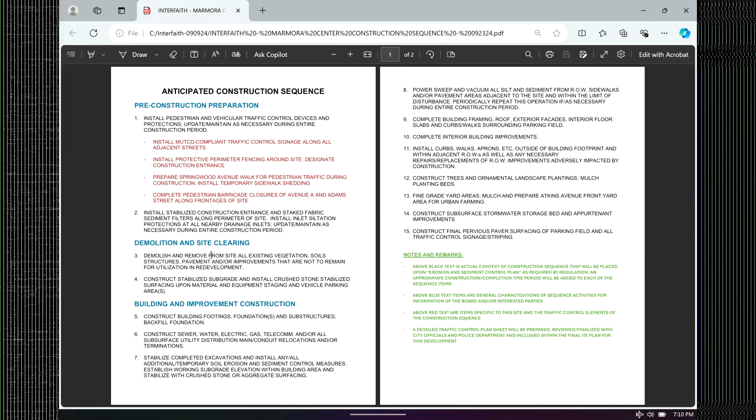I have another example just to illustrate. So what I have on this particular exhibit is a typical sidewalk. They call it temporary shedding, scaffolding, whatever you want to call it. It has fencing right up against the construction and overhead protection should things fall inadvertently as things are being constructed, but it allows pedestrians to go underneath.

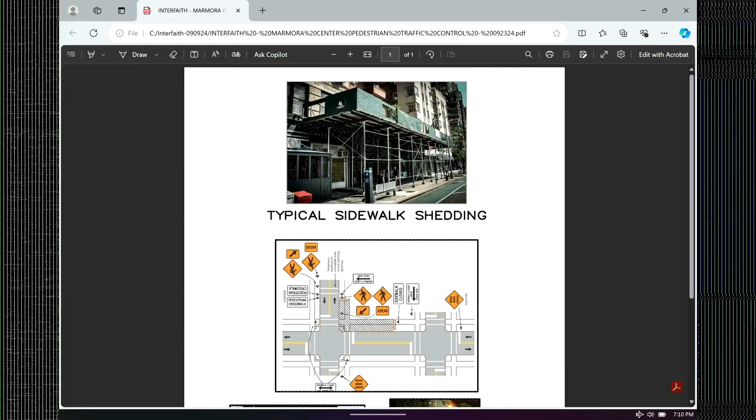Typically they are a minimum of 5 feet wide with a minimum of 8 feet of headroom, which seems like there'd be no problem. We will also be doing, to comply with requirements and make sure everybody's on board, a pedestrian traffic control plan, and as necessary, a vehicular traffic control plan.

There'll be some work along the curb lines of Springwood Avenue and along the curb line of Avenue A, and so those would require some temporary vehicular traffic control just to be sure everything is safe.

So the Manual on Uniform Traffic Control Devices has typical traffic control designs. This is just a typical one I pulled out of the manual. This is more geared toward pedestrian control.

And this one includes a temporary crossing, which I think we would do along the southerly side of Adams, because if you recall, there's a restaurant on the corner of Adams and Avenue A, so one could cross from the westerly side of Avenue A to the easterly side at the corner the restaurant's on with a temporary crosswalk. Other than that, the symbols, signs, and barricades you must use are all spelled out in the Manual on Uniform Traffic Control Devices.

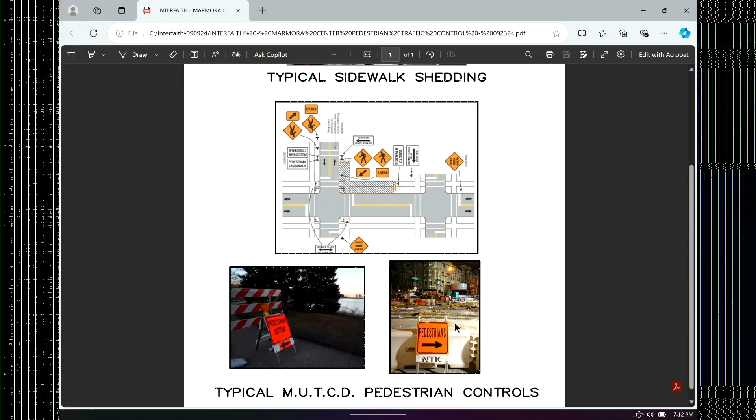And we would employ them. Per Sam's recommendation, we would coordinate that with the City Department of Public Works, but I'd also contact the police department, especially the traffic bureau, because they may have some valuable input. Other than that, we have no problem complying with any of that or anything else. And I haven't answered any questions yet, so.

Is the shed right around the corner? The sidewalk shed? Okay, so the shed would go—it doesn't go around the corner. I'm envisioning it, but I'm open to suggestions. That hatch is just their symbols, not our specific site—that's just a typical traffic control plan pulled out of the manual we have to reference.

Should it be lit underneath at night? Is there lighting? Oh yeah, it would have to be safe, certainly. The shed's just going to be on Springwood, along the Springwood frontage of the site, right against the building facade.

Because the other pedestrian walkway is closed, we're gonna close it too - yeah, there's no reason not to close with safety issues, Adams and Avenue A. As I said, there's no parking on the frontages of this site, so it doesn't really matter.

So I'd say thank you for providing this. A standard condition of approval is always to have a pre-construction meeting with James, and there's other few city officials there, right? No, it's just me. Just you.

Yeah, as long as you provide a site plan that I can see everything. I want to know the estimated amount of months it'll take for construction, what time of year you plan to do construction, and if any street space you plan to use, whether it's parking or street space during the project - like if there's anything you need a crane for. I just need to know where you're planning to put it and generally estimate when.

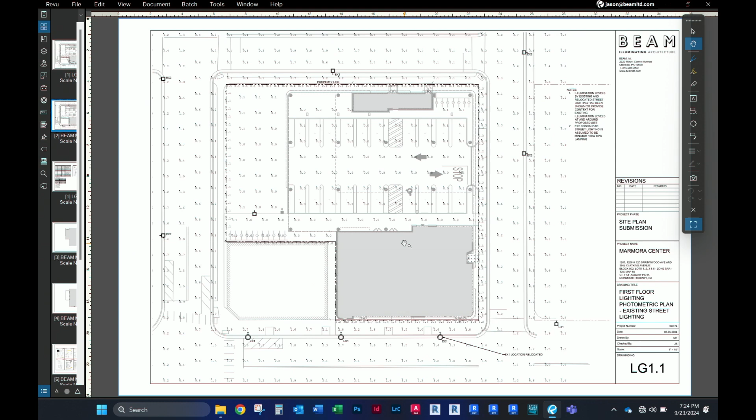The next sheet goes through the different calculations that we ran and the statistics for those calculations. It goes through each of the luminaires and provides a description for them, showing they are either all no uplight in compliance with dark sky, or if there is a minimal amount of uplight, it is undercover. So like the garage light has a minimum amount of uplight, but since it's covered, none of that will escape into the sky. So all of the lighting does meet dark sky requirements.

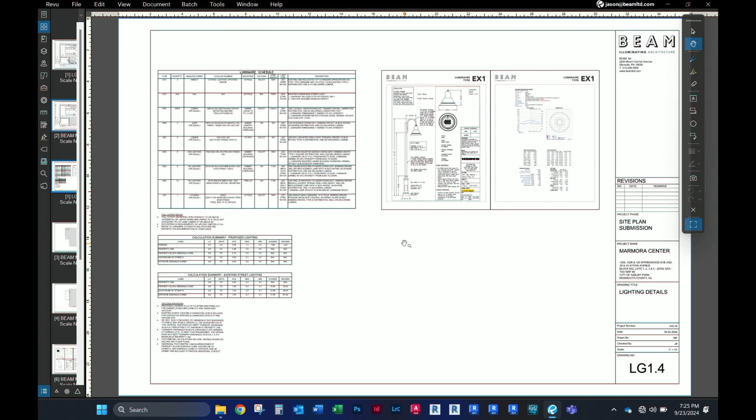In addition, all of the lighting we're proposing is 2700 Kelvin, except for the street lighting, which I understand is the typical pole for Springwood Avenue. That is 3000 K. And in our calculations, we did adjust for all of the outputs, the color temperature, and any other anomalies to be able to provide a realistic understanding of what illumination levels are on the ground.

And then just very quickly, the upper levels, we have fairly simple surface-mounted downlights at the trellis structures and recessed downlights where we do have a building overhang. Again, these are downlight only, and they are really targeted at the balcony floor areas themselves and will not provide additional light beyond.

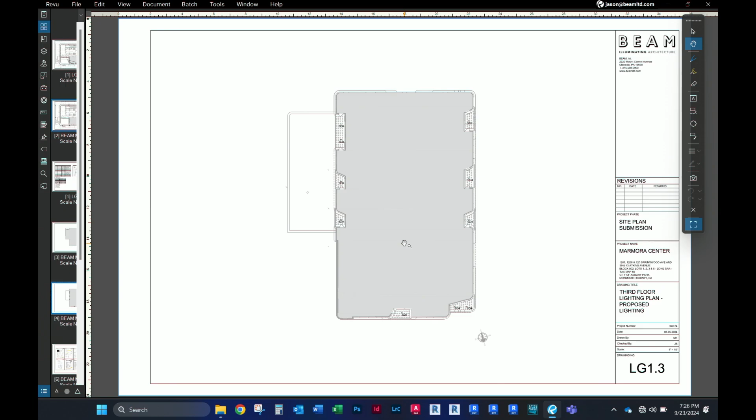So in terms of the engineering questions, I know that there were a few. Just get those real quick. I do think you hit them. I hit them all? Okay.

In your professional opinion, is this lighting satisfactory for this project? Absolutely. Does it provide any spillage that you would consider excessive? No. Okay, Mr. Chairman, I have nothing further for the witness then.

There was a question about, in Springwood, about the secondary egress, if you wanted opaque glass, regarding the lighting. So that was in there - the light inside the building that could be shining through the windows in the egress area.

Did you design the interior lighting at all, or just the exterior? We have not designed the interior lighting, but what we can do is ensure that it's a specification grade luminaire with a nice glare-free frosted lens, and also it can have an occupancy sensor that dims it when it's not in use, so that it dims down to a low level and is not obtrusively bright.

So there was talk that in several stories we're talking about transparent glass, right? Right, that would be illuminated at night out in the street. Correct, yes. So the issue was whether to use opaque panels or do something with the light, so it would not come out to the street or close to it.

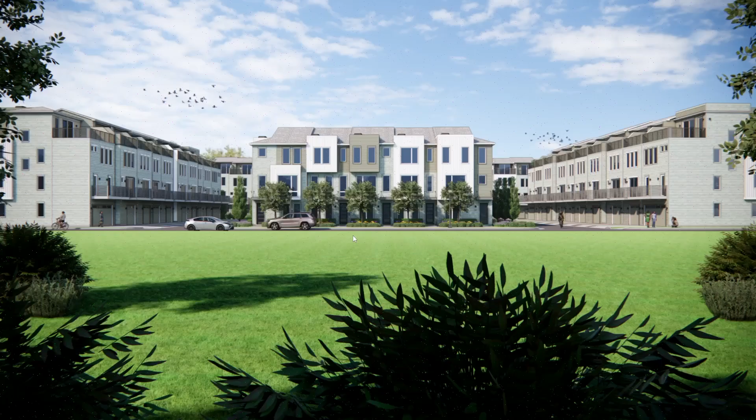When you were here last, you presented depictions of each side of the development, except for along Webb Street. I'd like to mark what you have up here as exhibit A4. Could you describe what this is and how it depicts how the buildings may look along Webb Street? This view of the proposed project is looking across Webb Street to the east. It's zoomed out so you can see all three buildings that front onto Webb. 8th Avenue is to the left and 7th Avenue is to the right. The street trees have just been omitted for clarity, but there are street trees here, 5 of them proposed. There'll be 1 in front of the 4-story townhome fronting on 8th, 2 in front of the 3-story townhome in the center of the block, and 2 more in front of the 4-story fronting onto 7th. Again, it's just an additional view for the benefit of the neighbors because we didn't have this at the last meeting. And the building along Webb Street, that's the 3-story building, correct? Yes. Those are all the questions that I have for our architect.

This grassy area doesn't exist, right? There's homes there. Just to be clear, this is a more reasonable view of what you'll see from the sidewalk across the street, but just to get the whole context in. Just for the public, I want to make sure we knew where we were.

All right, so I know that last time we didn't get to questions from the public for you. But before we do that, does anyone from the board have any questions for this witness about any of his testimony about architecture that we haven't discussed yet? Questions from our professionals about architecture? All right, let me take this in.

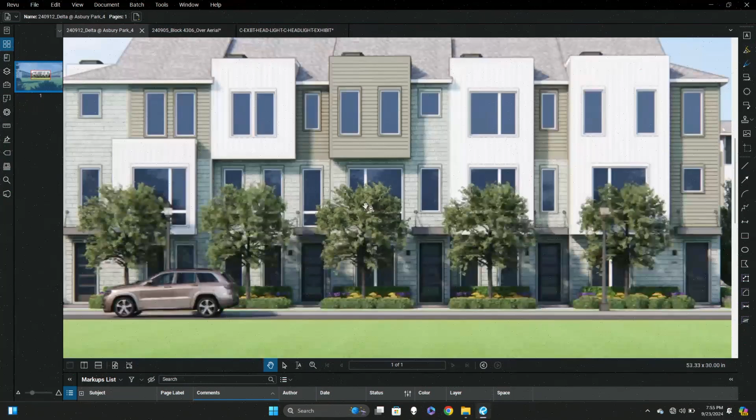Correct. So what you're really talking about is quite a distorted view from that. The bottom half of that rendering can be ignored. You pick up at the cars at Webb Street and we see the buildings. Exactly, it's only zoomed out so you can see all 3 buildings in one image, but if you're standing on the sidewalk on Webb facing this property, in the middle of the block, it's more likely this is your view.

And if you're standing closer to the end, it's more likely that you're going to be facing directly toward the 4-story and the driveway. So you're never really going to see this entire block as shown on the screen. It's going to be quite a bit closer to what you just put up.

Correct, if you zoom in, depending on where you're standing on Webb, you're only going to see a portion of the overall image. So the cars there are really what you're looking at and what's behind them, basically. That's what you see from Webb. Correct, and again the street trees aren't shown, but there'll be 5 street trees along this frontage.

So I'm just thinking of another project we had where, because there's going to be this whole row of cars parked in front of the garages, didn't we put an architectural wall up? Yeah. Is that something we think should be there? That was a Kingsley frontage. Yeah, and that had a more impactful streetscape.

Not to say that's not warranted necessarily here, but it's a side street compared to the avenue.

Can we see a close-up of the buildings on the end without the one that's in the center? Right here? Yeah, do you have a full view of that side? Right, those were shown at the first meeting, we had views of every elevation. I can pull it up. This would probably be going back into A2, which was the submitted architectural plans.

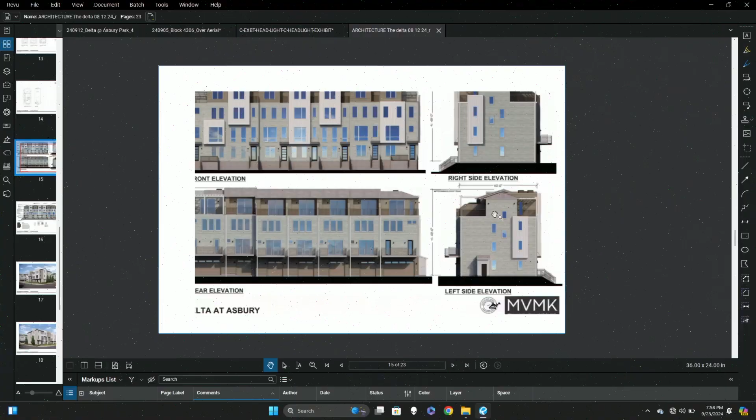So these are the elevations of the 4 stories on the corner. This is the side that faces interior with the sprinkler closet, and this is the side that faces the street. So this would be the elevation on the right side of the original exhibit I showed.

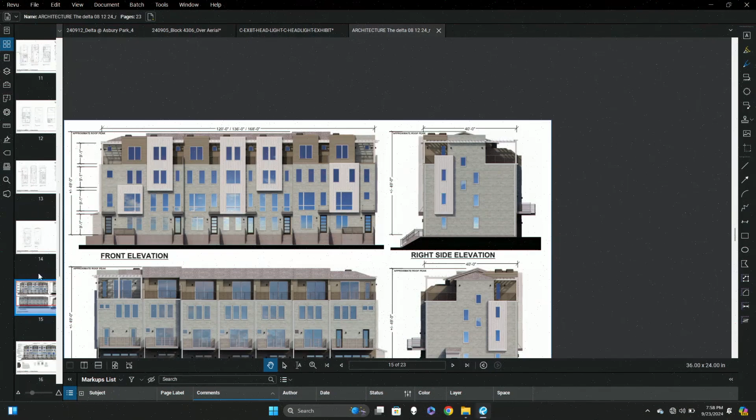It might be helpful if you could go back through the landscaping. So we do have the landscape architect up next, who will talk about the landscaping around the buildings. This is just an elevation view, it just shows the building, not in its setting.

But the report also points out that the lack of turning the corner creates, on multiple frontages, this sort of dead facade.

So if you want to maybe go back to the renderings that we had at the beginning, the pergolas are on the 2 corners on Kingsley, but not on Webb. Correct.

So we do have our landscape architect, as I said, who is going to show these buildings in the context of the landscaping that's proposed around each one, and that is our next witness up.

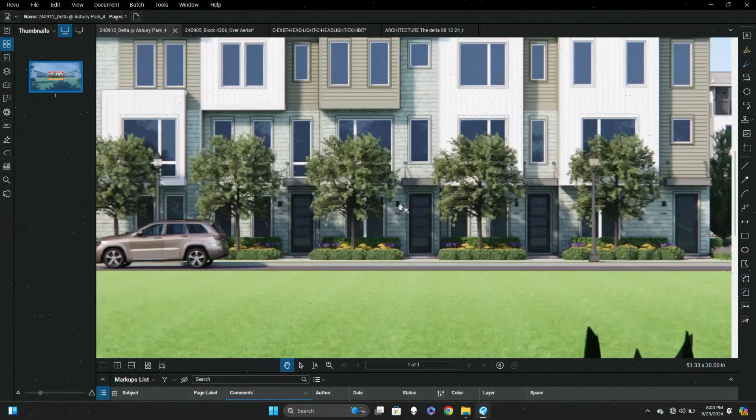Is that correct, there's no dusk shot here? If we zoom in, you can see there's a light at the entry of each one. What about on the decks? Can we see signage and then the lights? You can see there's some at the garage door, and then one up on the decks.

So is there anything board members would like to see potentially changed in the architecture? I know Dan just mentioned, could we have vegetation in the rear, and variation of color and materials in the rear. If that's something you guys would be amenable to, maybe you could show us options.

Michael, did you bring up about the wall or something in the street at first, to shield the parking spaces? I mentioned that, but I don't know if that's something people think should be there or not. Donna brought that up in her report. Yes, but not on Webb Street, that's on the Avenue side.

If you look at item 1.2 in your report, I think you pretty much cover the whole facade of all the facades of the building, it seems to me. This is about the sides of the buildings we're talking about. As I read Donna's report, item 1.2 on page 1, she talks about all the facades of the building not being very friendly to the street.

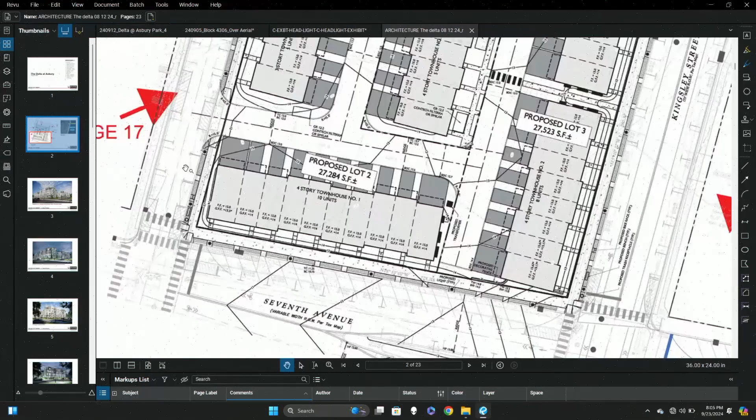No, he's saying parallel to 7th, the one that's parallel to 7. He's trying to say that the building's on an angle right now. What I'm saying is that the angle of the building is in connection with that lot. Oh, it's following the street lines rather than- yeah, I see what you're saying, the interior. But it feels like it should follow the street line. Agreed.

Maybe it should, but if you want to hide the view of those garages, it's a simple matter of just changing the angle. There may be another way we can help buffer the garage, but rotating the building has a lot of logistical issues. But I understand your comment, you want to screen the driveway as best we can. Why is it logistical? Why is it a logistical problem?

Just because of the way townhomes are constructed, you want to rotate the building, if I understand you correctly. Yeah. So it would need to be constructed independently, or there would be a gap between the buildings where you're rotating them. It's the same layout, except you change the location of the green spaces between the buildings.

Right, I could have our civil engineer address why the buildings are spaced that way for the drive aisles. Yeah, I think there's an advantage to having the building front 7th Avenue. So maybe there's a different opportunity to screen those garages rather than rotate the building.

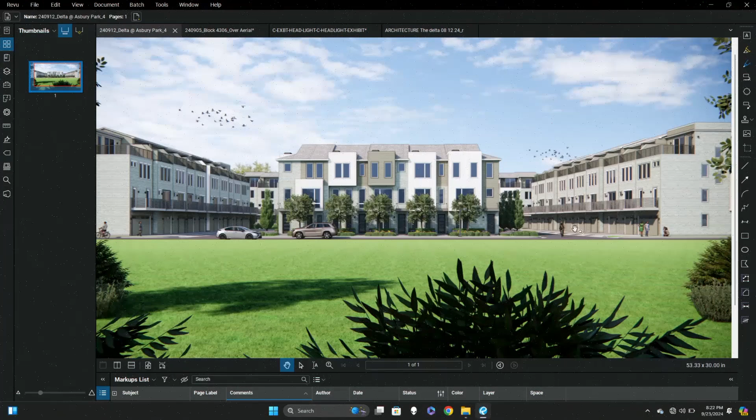Hi, Karen May, 301 8th Avenue. So question for the architect - the picture, can you go to the picture with the park-like look from Webb? Yeah. So we've already agreed and you've acknowledged that that green space does not exist, because one of the doorsteps is actually nine steps from the sidewalk. But visually, that small building facing Webb, that's the three-story building - visually, to me, it looks to be almost the same height as the four-story buildings on either side, and you can't see the four-story building that sits behind it.

We need a question. Am I interpreting this correctly? I would think that with a 3-story building, I'd be able to see the 4-story building behind it, yet I can't. This is a perspective view. If it were an elevation view, you would see the 4-story building behind it. This imagines you're standing on the ground as a person. The building beyond it would have to be quite tall for you to see it. So you're not misinterpreting that this is a 3-story building, and there is a 4-story building beyond it. But you have to think about it like the way a camera works.

But the buildings to the two sides are also 4 stories and they appear to be the same height. That is also a camera effect. As you move away from the center line of the camera, the height appears to get shorter. However, it is a 4-story building and a 3-story building.

Like that picture of President Carter and his wife? Yes. And the Obamas? Yes, they seem like giants because it's perspective.

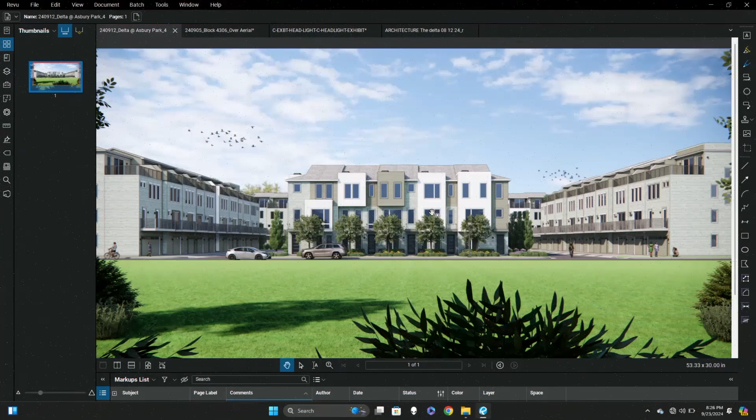I don't know that'll be enough, but understood. And if it's going to remain 4 stories, going down to 3 would be better, as Eileen said. But as far as architecturally along the back of the buildings, the decks and such that we're seeing, is there anything that can be done to make it look less plain? I think we touched on changing the color scheme, so maybe alternating the color palette.

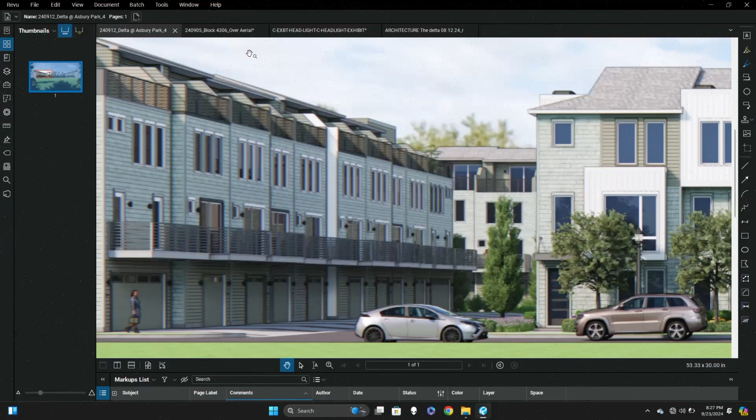It's still just going to be straight walls, though? Well, they are stepped, they do jut in and out, so it's not one continuous wall. It looks like it, though, so maybe with the color change it could soften it some. Yeah, it's primarily that view that doesn't help, but you can see that they are staggered.

It's obnoxious for everybody on Webb Street. That's it, no other questions right now. Thank you. Anyone else from the public have questions for this witness?

The last meeting I was here. My name is John Frederickson, and I live at 303 8th Avenue.

At the last meeting, when I saw the 3-story buildings, they were in the middle of Webb Street, right up to the end of Webb Street. There was a building down this way and a building down this way. We were told these were going to be 3 stories, and the rest was all going to be 4 stories on these 2 sides. That's not what I see today.

I see, if you can go to picture one. So it's the same plans as last meeting and this meeting. The site plan and architectural plans have not changed from last meeting.

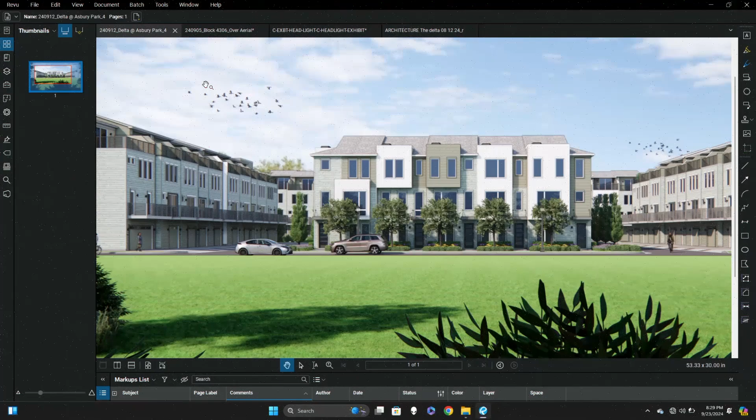Well, I'm talking about this picture. If you transform that into what they said last meeting, that center area would be pushed all the way to Webb Street. Where the cars are is Webb Street. Yeah, but you see these 2 sides here? They didn't exist. That 3-story area was pushed all the way to Webb Street. They're not pushed all the way to Webb Street here.

So I think maybe our civil engineer can testify as to the location of the fronts of the buildings relative to the sidewalk. You'll have additional testimony from the civil engineer about the layout of the entire block and what buildings are where. But just for clarity of the record, we have not made revisions to the plans. They are exactly what was testified to. This was just an additional illustrative exhibit.

Last time you showed the elevation drawing for the 3-story building, with a different perspective in the architectural set displayed at the last meeting, so you couldn't see the 4-story buildings on the sides. No, and that's why we created the rendering you have tonight. We had no view from Webb.

Okay, any other questions from the public for this witness? Excellent. What did they say?

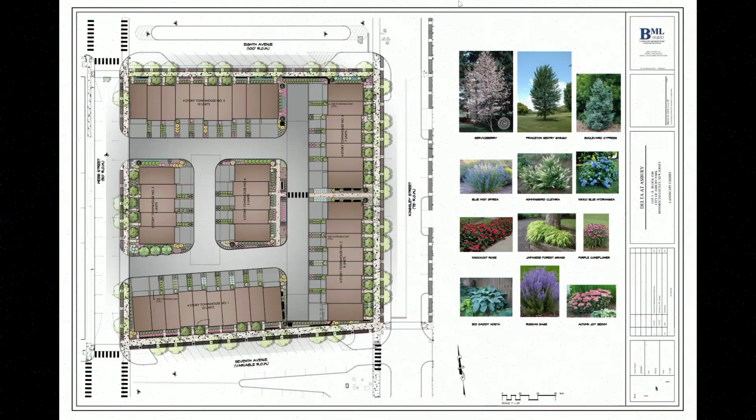Oh, okay. Yep. There we go. Okay.

Here you can see the retaining wall right along the edge of the sidewalk, wrapping into the back corner of the building. Behind the retaining wall is a series of evergreen shrubs, and then behind that some lower ground cover and perennials. From the roadway, what you would see is the retaining wall with the evergreen shrubs on top, which would serve to block the headlights.

What is the dark, hatched area above that? That's the sidewalk. Right above that, that's part of the streetscape improvements. That's pavement? Yes, brick pavers.

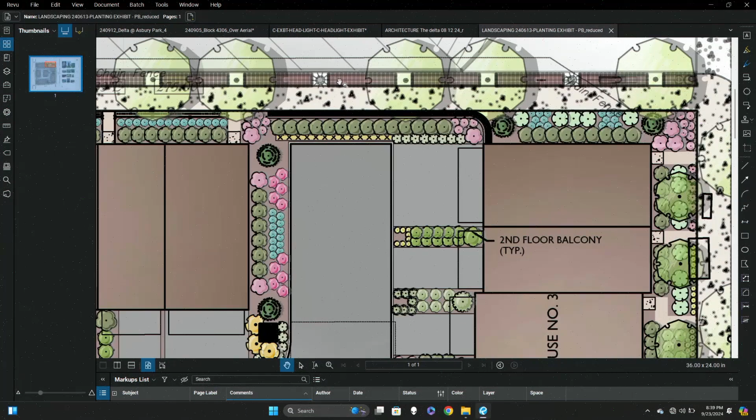And that retaining wall is a seat height retaining wall, correct? Yes, between 18 inches and 30 inches in design, so that you could sit on it as you're walking down the sidewalk. And there's another retaining wall that is a seat height, correct?

The other retaining wall is at the other end of that same driveway, and it's not quite as large. It just comes off of the building and wraps pretty much towards the end of where that driveway would be.

Who maintains those retaining walls? That's all part of the developer's property; they're responsible to maintain that. The HOA, yes.

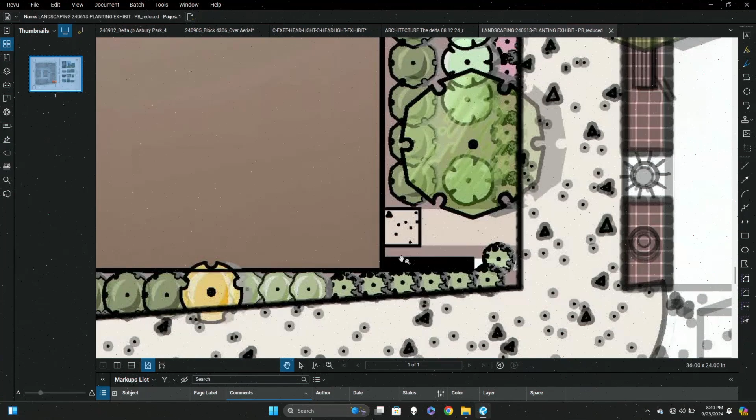Now I'll have Mr. Curley talk about the two other retaining walls, which are more structural, correct? I think one of them is right at the corner. Yes, there is one shown right immediately next to this one unit. It was more of a cheek wall against the walkway that goes up to that one unit, just to get the grades to work. While I don't think it's shown on this plan, the intention would be that the other side would also match and have a small retaining wall, very similar, right along this interior walkway.

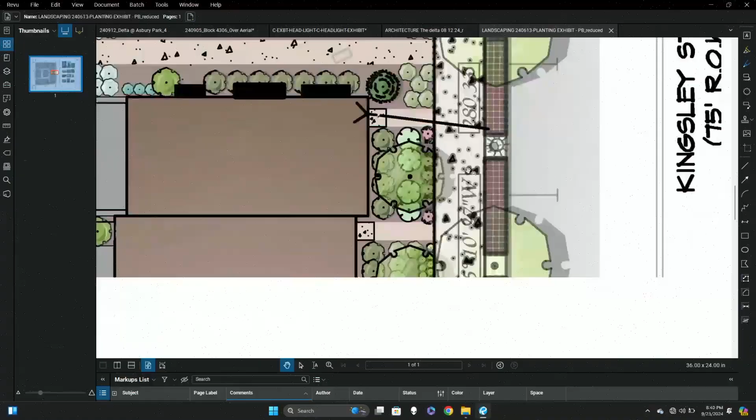Brian, scroll down—I think there's one at the south end of that building. The other one is at the south end of the south building. No, it's on the other plan.

If there are other retaining walls, this plan would be updated to show those and would be included. I know there were some coordination issues with stoops, steps, and porches that aren't reflected on this particular plan, but we would revise the landscape plan to accommodate those features. I expect these to be very minor modifications that wouldn't change anything I'm testifying to tonight, but there would be those two other, most likely smaller, cheek walls, we'll call them.

And the retaining walls on the sides—they're all within the property? Yes, yes, they're all within the property. There's no construction within the right-of-way.

So let's walk ourselves through more on the retaining walls. So the retaining wall ends up being kind of the same level as that driveway? Yes, the top of the retaining wall is level with the driveway. So it's not providing any screening to the driveway?

The wall itself is not—the wall is intended that you could sit on it. At one point, we had a fence on top of it to provide extra screening. I believe we've taken that out since, and we're just leaving the evergreen shrubs at the top to screen the headlights.

So if you could just walk around the block, showing at the corners where there's going to be landscaping proposed. Yeah, there is landscaping proposed at each of the corners. Because of the angles in the right-of-way, some of the planting areas do get narrow at certain points, but everywhere between the right-of-way and the buildings would be landscaped.

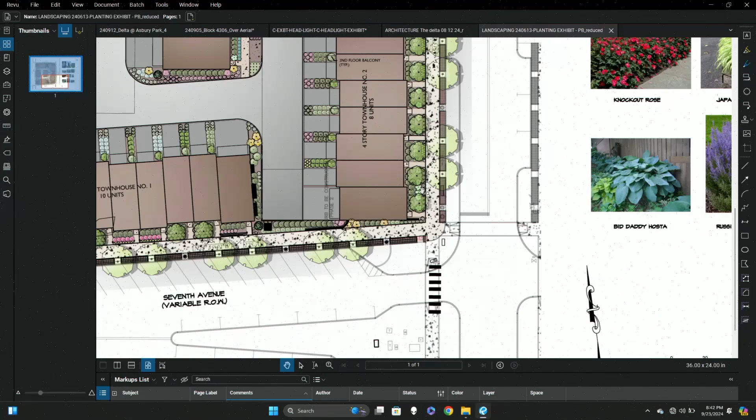Starting at the corner of 7th and Kingsley, these are the fronts of the units. You can see they all have plantings and a small tree in front of them. As we come down Kingsley a little further, there is a walkway that goes between the two buildings and gives a nice view of the central 4-story building.

Originally, that building was twisted 180 degrees, and the view you saw was the back of the building. One of the key changes we made was to rotate that building around, add a new walkway in front of it, and enhance the view so it looks a lot better as you're looking through that corridor from Kingsley Street.

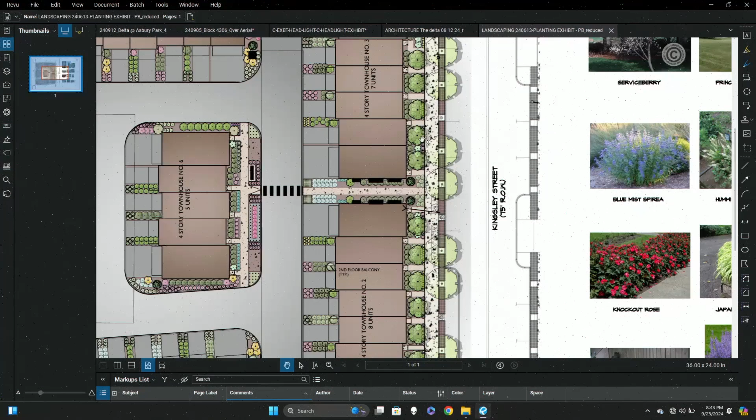Brian, can you zoom into the walkway? So you have the plantings directly in front of the utilities. And another issue, can you tell us about the blue plants labeled CB on the left? What's the height of those? Those are going to be about 3 feet.

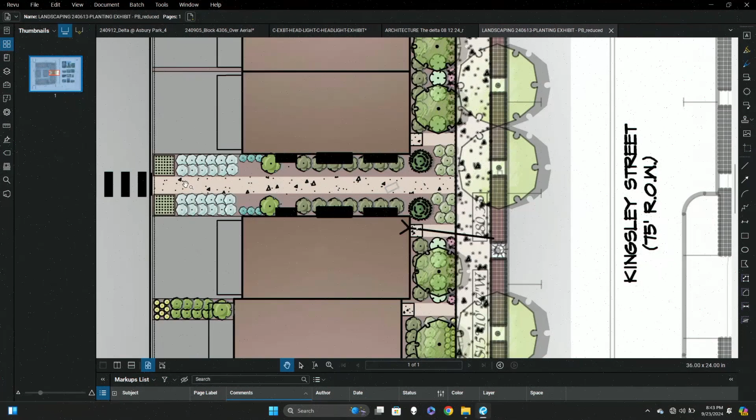My issue is that you have a mid-block crossing, so if you're walking across and you're 5 feet tall, you have 2 feet of elevation, plus you have cars parked there too. This might be more civil. Also right up against the walkway, we have a lower ground cover, which is probably 4 feet wide.

The ground cover is only like 6 to 8 inches high. No, I'm sorry, 4 feet width. So my concern, again, might be more civil - if you're walking across that walk and there's a car potentially parked there, are they 4 foot? They're 2.5 to 3 foot. They're not 4 foot, they're low, small flowering shrubs, nothing that's going to block a view. They're about knee high.

Okay, again, I think it'd be more civil with cars parked there, but that's fine. I don't see any visibility issues, especially with even a child that's only 4 feet tall, with the selection of plants there.

Okay, thank you. In front of the utilities, those shrubs? For the utilities are evergreen shrubs. Those may grow to 3 or 4 feet, intended to grow below the utilities. One of the challenges is how do you hide the utilities but make them visible to the utility company - it's a catch-22, you also have to access them.

Right, how would they access them? The only ones that would actually need access are shown with no plants in front of them. I believe these are more the electric remote read meters that you can see from the walkway. These are the only ones that needed actual access - that was the water, I believe.

But just like devil's advocate, if a meter needs to be replaced, how does the utility company access them? What's your plan? Yeah, they're small shrubs there, they do it all the time. I don't see meter replacement being an everyday maintenance function - if they had to remove a plant or two for access, they would do it and then it would be replaced. So if you're walking down that walkway, there's low shrubs and meters on both sides at eye level? Yes.

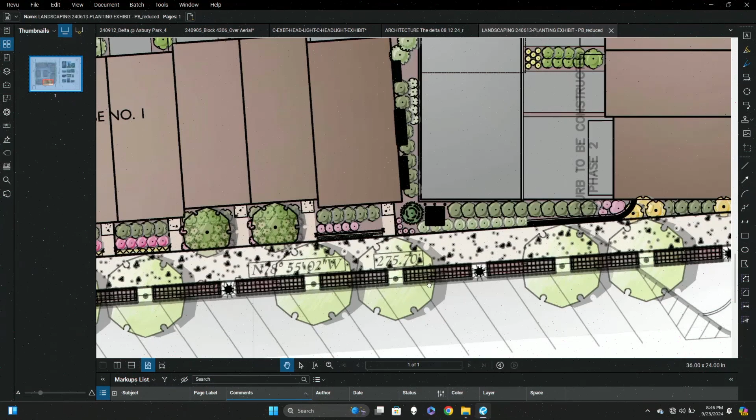And then I'd have the same question about buildings 1 and 4, where the meters are - are those going to be visible from Kingsley and 7th and 8th Avenue? The engineer would be better to talk about the location of each meter. But the only visibility I see is of the one transformer along 7th or 8th Avenue - I believe there was some discussion of alternative locations for that. As shown now, this transformer would be the only utility structure clearly visible from the right-of-way.

I'll ask Mr. Curley to go through each of the utilities when he testifies. You said you had a fence at one time above the retaining walls, but you took them out? Just at this one location at the end of the driveway, where we have the shrubs, the ground cover, and the retaining wall - we had a fence there, and there was some concern that the fence on top of the retaining wall would be overbearing for people walking down the street, too tall of a barrier.

But you want people to sit on the wall? That's the intent - to allow people to sit on the wall. Really? Yes, that was a request from the TRC committee. Are there any retaining walls on Webb? That I don't know - there are no retaining walls on Webb. Webb is actually the high point of this site when you look at the grading, so there's no reason to raise those units up any higher.

So if you continue down and around, just to establish that the landscaping does continue all down Kingsley, and does wrap the corner around 8th Avenue.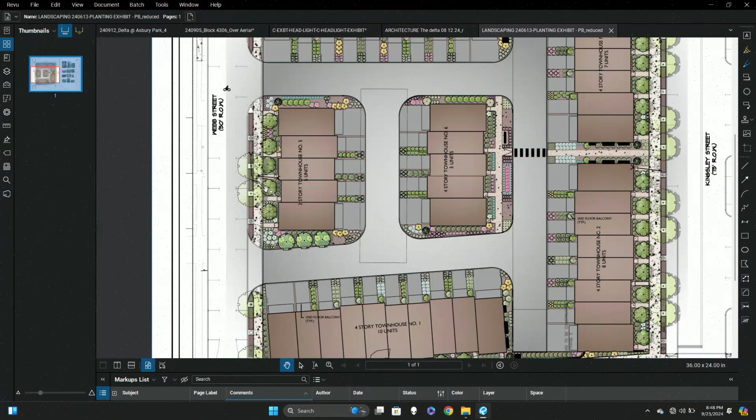As it's shown now, there's no planting strip along there. But in front of the four-story building that is facing Webb Street, there's an ample amount of landscaping, including small ornamental trees, flowering and evergreen shrubs, perennials, ground covers, grasses, very similar to what was shown in the previous exhibit.

The southern building is pulled away from the right-of-way a little bit, and we did have some opportunity to add some evergreen shrubs along that building to soften the feel as you're walking down Webb Street. So the only place that does not have plantings between the building and the right-of-way is the northern four-story building on Webb Street.

In the renderings, I don't think it was shown, but are there little planting spaces between each of the driveways? Yes. So you have plantings on the easterly end of the building. Right? Yes.

So wouldn't it be better to give plantings to people instead of looking at a blank wall, shifting that down? I'd have to defer to the engineer who laid the site out as to the location of the building. We'll have Mr. Curley testify next.

But as for the planting strips between the driveways? There was some comments and concern that the buildings, when you looked at them from the back, from Webb Street, looking down the driveways, everything looked plain. Those renderings did not show any of the landscaping in the areas between the driveways for each of the units. The original plan just called for almost a monoculture planting - everything did look the same. One revision we made when we came to the planning board was varying the plantings in each of those islands to give a more attractive and aesthetic look, and to soften it so it doesn't look like a hotel. What's the width of those strips?

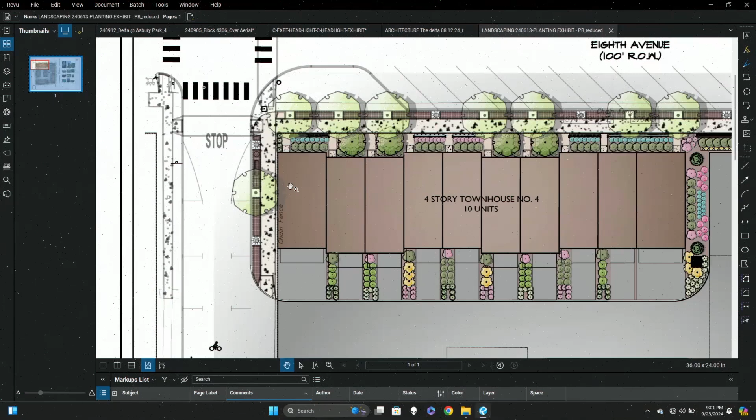So my question, is that building going to go right up to the sidewalk? Yes. There's no room for anything there? Fantastic. The engineer can verify, but I believe the setback to that building is less than 1 foot, so there's no reasonable area that you can plant anything there.

That's fabulous. Okay, now my next question is, if I look at the overall picture, I'm not seeing any grass anywhere, any space that is left, because right now it's all grass, or 95% grass, that lot. So everything is being either built or paved on, or you've put shrubs on. There's no actual grass remaining anywhere on this entire city block. No.

Last question, I don't know who this goes to, but you talked a lot about the master developer over the street redevelopment. Who approves that, and how do we get any say in that? Because that's a significant impact to those of us who live there, and I'm not aware of where that's happening, because it seems to be outside of this.

She's asking about the infrastructure component plan, the 8th Street, 8th Avenue changes. Ms. Smith can probably answer this better than anyone else.

Sure, and apologies for having my back to you, but the infrastructure component report is something that's already been approved by the council. The council has been asked to consider revising it to allow for those bump outs. But the infrastructure component report that sets forth the width of the streets, how the parking spaces go as far as angled versus parallel, that's all something that's already been adopted by the council and is part of the redevelopment agreement that was signed between Asbury Partners, the master developer, and the city.

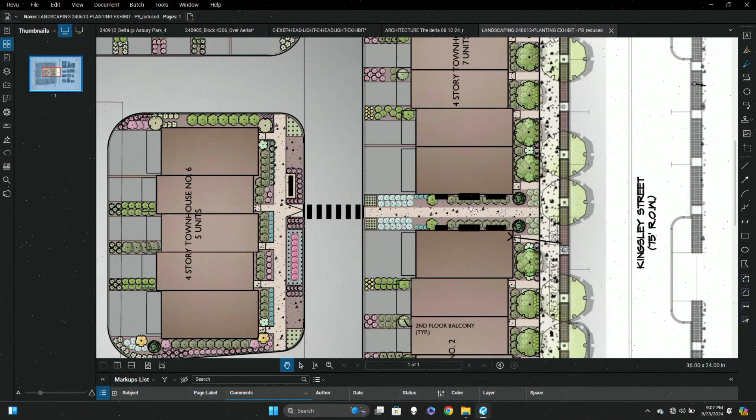What about in front of the units right there? There are plantings in front of every unit, in front of the interior units. Did you guys think of putting anything larger there? Did not, for spatial reasons.

Got it. And is there anywhere on the interior where you guys considered putting a larger tree or anything? We absolutely considered it at a lot of places, but due to the spatial constraints and the nature of the development, there's simply no room for larger trees on the interior.

Like a previous commenter said, so there's no grass anywhere? No, the grass was left outside. Grass takes up a lot more resources, and there's a lot more chemicals that go into fertilization and pest control. Shrub plantings, ground covers, and perennials that are native are much more ecologically friendly and would look a lot nicer, and you don't get the lawnmower and weed whacker out there at 7 o'clock every Wednesday morning.

So on the exterior, on the street side, do any of those plants encroach into the sidewalk, or are large enough that bushes will grow into the sidewalk area? No, the only thing is some of the ornamental trees in the front have a couple branches that start to reach the sidewalk at a higher level. If that happens, they would just be pruned back. But the intention is not to have any plantings within the right of way.

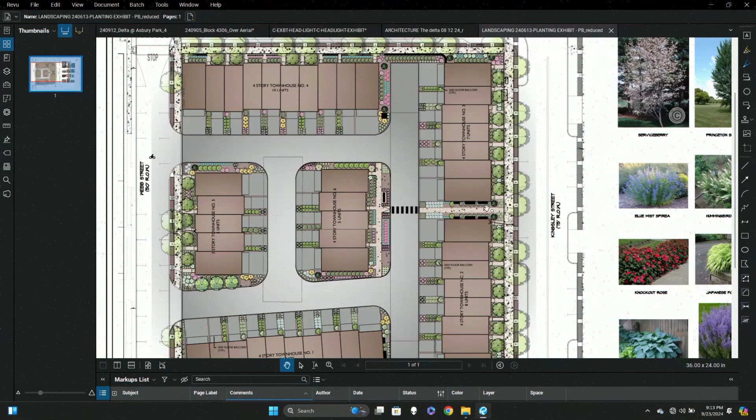So on the northeast corner, is there a tree right at the corner of 8th and Kingsley, on the interior? There is a small evergreen tree shown at the corner of that unit for an accent planting to accentuate the architecture, but it's not a large shade tree. Again, the shade trees along the streetscape will be provided with the streetscape component, which is not part of this application.

I'm just trying to figure out if there's anywhere you could get some extra sidewalk area in there. It's just so tight for surfers and people walking their dogs—there's a lot of people that go to the beach right there. Again, we're not encroaching into the right-of-way or the sidewalk area at all.

So this is why I was asking about curb extensions, because if you look at other avenues where they cross Kingsley where we do have curb extensions, you do get extra wide green space at the corners, which is nice to have. It's not currently allowed, which is why Ms. Smith mentioned they asked the city if it can be allowed - in the infrastructure component report, it's just not specified at every corner. So that's why they're asking for this corner.

And this sidewalk, so at the property line, there's the 4-foot sidewalk, and then there's like a 3-foot brick paver apron that runs to the curb. So between every tree, there is a kind of paved area - it's not a consistent material, but this material represents... I don't know if you can see what I'm pointing out here.

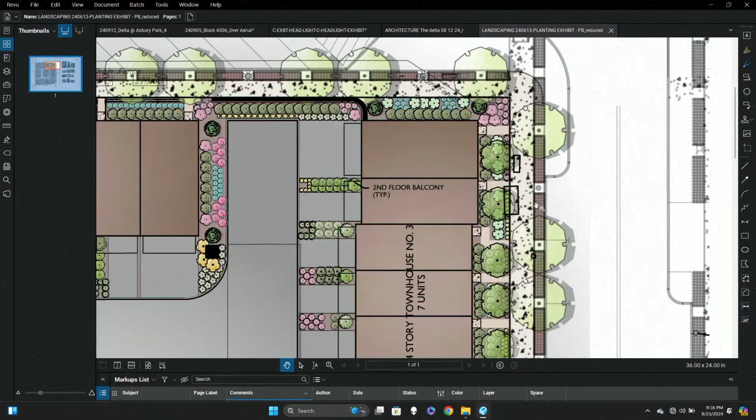Got it. So maybe this is a question for the civil engineer - currently at the end of the street, right there, the whole street widens about, I don't know, probably 20 feet on each side. So is that planting where the sidewalk sits right now? I don't know where the existing sidewalk sits in relation to what's being proposed.

But again, we are not putting anything in the public right of way. All of the plantings are on private property. Got it. Okay. Thanks.

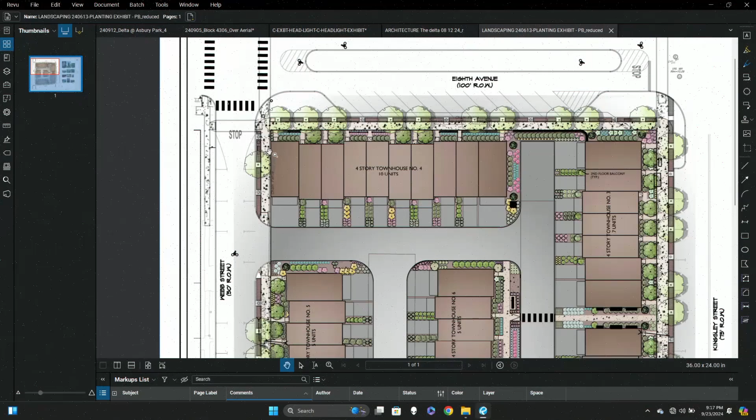Any other questions from the public to the landscape architect? Going back to the building on the northwest corner of 8th and Webb - your westerly building, dwelling unit is right up against the property line, correct? Within a foot.

What would you consider the minimum width of a planting bed in that area? It depends on what you're looking to plant. If you're looking to plant anything that would add a reasonable buffer, you'd probably need about, at a minimum, 3 to 4 feet, and that would be tight. Okay, and that would kind of match the planting on the south? That would more closely resemble that, yes. Okay.

All right, next witness. I know we've deferred several questions for our civil engineer, so I'd like to bring up Mr. Curley now to give his presentation and testimony and to answer some of those questions.

So as Mr. Curley sits down and gets sworn in - Mr. Curley, you swear or affirm that the testimony you're about to provide will be the truth, the whole truth, and nothing but the truth? I do. Can you state your name for the record and spell your last name, please?

Robert Curley, C-U-R-L-E-Y. We are going to be offering Mr. Curley as an expert in the field of civil engineering. So to that end, if you could just briefly explain your education, background, and licensure. I've appeared before this board - wow, for a long time.

Probably close to 18 years. I was also working with the master developer, preparing the infrastructure and ultimate plans that get built throughout the waterfront. I've been the design engineer on numerous projects and presented before this board for quite some time as a licensed professional engineer and a professional planner. But I'm here just to give engineering testimony.

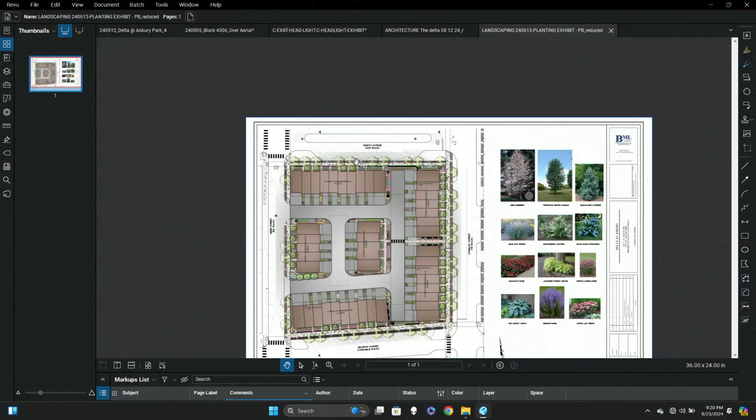Wonderful. So Mr. Curley, there's been a number of questions asked so far. I was going to ask you to start with the subdivision, but if you'd prefer to start somewhere else, please feel free. I was going to do a different presentation, but based upon the quantity of questions that arose on the infrastructure and what it's ultimately going to look like surrounding the property, I just would like everyone to understand that right now the roadway widths, in particular on the avenues, are going to be substantially increased. The cartway width, so the pavement, is going to get closer to the property lines. And what that's going to do is provide an opportunity on 8th Avenue to put in an island and have angled parking for the entire length.

And likewise on 7th Avenue, it'll be the same. There will be on 7th Avenue, Kingsley Street, and 8th Avenue a 12-foot width between the curb and the edge of the back of the sidewalk. Currently, there's arbitrary sidewalk widths in the range of 4 to 5 feet. So that's what will exist with the infrastructure improvements currently being proposed.

Bless you. So you're saying the street widths of 7th and 8th Avenue are actually going to increase? That's correct. What is the current width? Are they 200 feet there? That's not the flare out on those streets, right? What is the street width now? They range somewhere in... the cartway, curb to curb, I don't want to say a wrong dimension. I don't know that answer.

What I can tell you is that the improvements we're proposing will provide an equal amount of parking that exists today compared to when the finished product is done. Currently there are 45 parking stalls surrounding this block. When we are done, there will be 45 parking stalls. No, I know, but I thought you said you were increasing. That's correct, the street, that's correct, so it's going to be increased. So we're providing... and I don't have the exact dimension, I don't want to indicate an incorrect one, and in particular because of the bump outs on the corners there's some narrowing there, and we're providing 24-foot wide aisles. Again, I don't want to give you a wrong dimension.

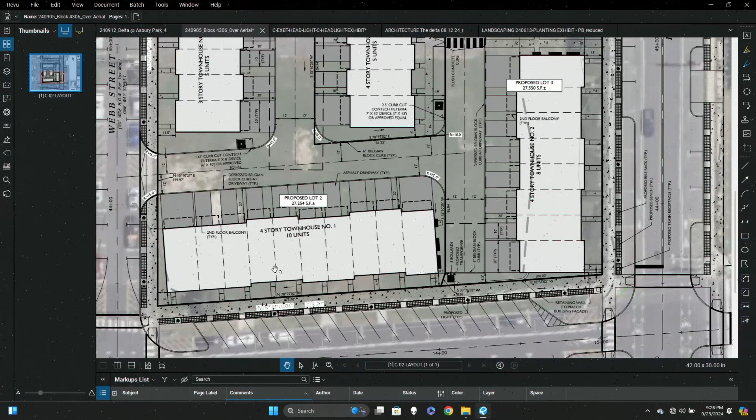Now when you're looking at that, the ones that front on 7th Avenue, it appears that the two ends are wider buildings than the ones in between. That's correct, the end units are a wider unit. So that'll go to the question about the planting, that the one at the westerly end is right abutting Webb Street, and there's not sufficient room for planting.

So if it were actually a lesser width, there would be more room for planting. Or if it was shifted down, where you have the planting at the easterly end of that row, if that was either split or moved to the westerly, then we could have some plantings on the Webb Street end building. That's a correct statement, yes.

Would that be difficult to do? Those would be one-car garage units, which are the interior units. That's not the intent. The intent would be to shift the building to the east to provide an equal separation distance from the curb line to the building line, and as Mr. Leff indicated, to provide a 4-foot area for plantings adjacent to the sidewalk. That could be accommodated, yes.

But that's something we probably should discuss with the applicant as far as the ability to move that down. Yeah, and Dan, you probably wouldn't want the narrower units on the end anyway, because the end units have windows and stuff on the side that give them visual interest. Well, I don't want narrow units, but I think the issue is to have some planting. Yeah, agree.

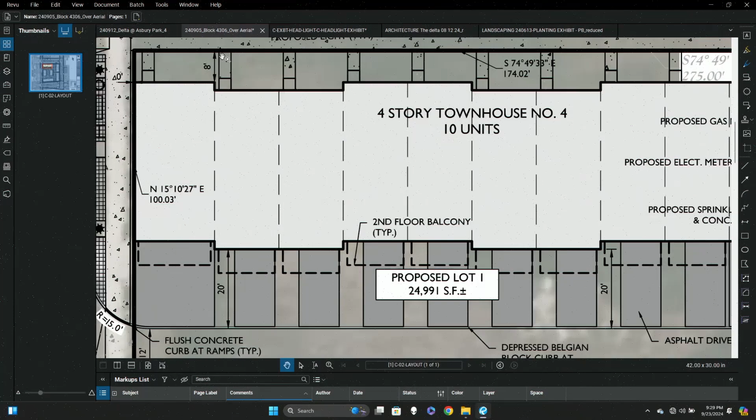And then what is the setback from the property line to each of the buildings? So for building number 4, from the property line to the building is 8 feet. So that would, for example, in that location, be between the building and the curb approximately 20 feet. That's correct.

The building to the back of the sidewalk is 8 feet. And then from the back of the sidewalk to the curb line, minimum distance... The minimum distance from the building to the edge of the pavement would be 20 feet. So that 8 foot is the steps and the planting area.

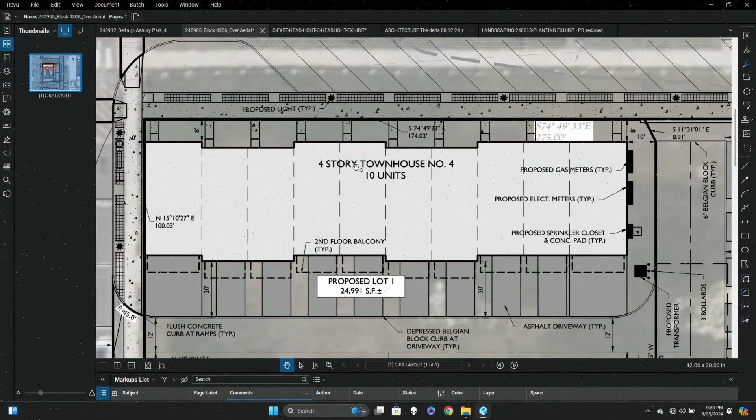That's correct. That's on the north side? Correct, on 8th Avenue, on the 8th north Avenue side.

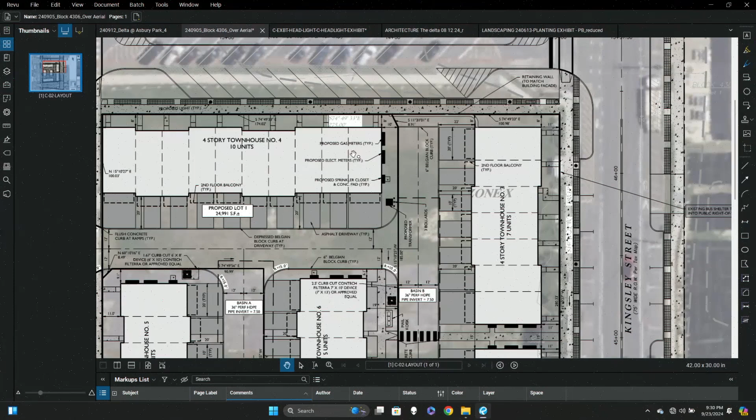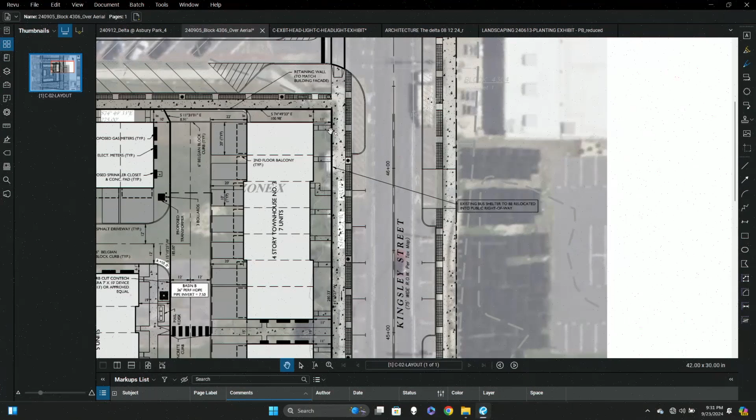Okay, if you could look at the same along Kingsley Street, please. So the side setback for building number 4 is again consistent with the alignment of building number 1. 8 feet to the building to the property line on 8th Avenue. And then from the building to the property line on Kingsley Street is 11 feet. So again, the minimum distance between the proposed building and the edge of the pavement would be 23 feet.

And that's consistent for building number 3 and building number 2. Now, the side setback for building number 2 is 2 feet at this corner. That's the closest.

And then it's still 12 feet from the back of the sidewalk to the curb. So that's correct, without the bump out. And that's correct.

And how about building number 1? Building number 1, again, has a consistent frontage setback to the property line of 8 feet. And again, you would have another 12 feet to the edge of the pavement. So that would be 20 feet from the building to the edge of the pavement, the shortest distance.

And how about on the side as you wrap around Webb? So the shortest distance we have is 3 feet to the property line. And then on Webb Street, we have 8.5 feet wide total from the curb face to the back of the sidewalk. So at the most narrow point in that building, am I doing the math right, that's still 11.5 feet?

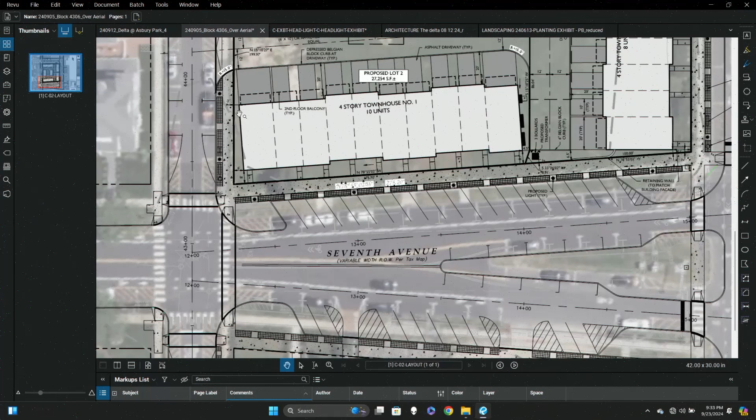And then how about the 4-story building on Webb? What are the setbacks there? 11 feet, so 11 plus 8.5 would be 19.5 feet to the edge of the pavement.

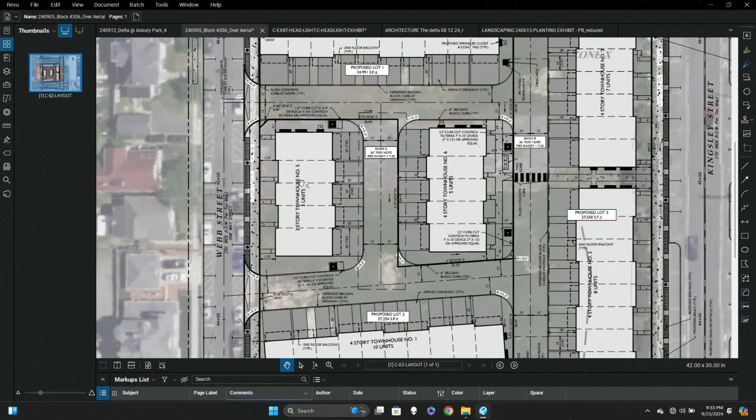All right, so you've talked about the setbacks. Before we get too far off the setbacks, if you could just discuss the proposed subdivision briefly. This has been completed on a number of applications that have been before the board previously. This is a temporary subdivision in order to affect the Fannie Mae financing that's associated with soils that have been deemed as contaminated. So it will help facilitate the remediation, is that correct?

That's correct. Now, in the subdivision we're proposing, there's currently 8 lots that make up the block, is that correct? That's correct. And after the subdivision, how many will there be? There will be 3. And will each of those 3 lots comply as to the total size and frontage of each lot? Yes. And then I think we've indicated that the lots will actually be consolidated into one lot prior to the final certificate of occupancy, is that correct?

That's correct. All right, I just briefly want to touch upon a few items. The first is on-site parking. How many total parking spaces are proposed on-site within the property lines? 114. And how many are actually required? 68. So 68 are required, but 114 have been provided. And will those spaces be located both in garages and also in external driveways?

That's correct. All right, I'd like to talk a little bit about the pedestrian access and walkways internal to the site. I know that there was testimony earlier about how the building in the middle was actually flipped around. Mr. Leff testified to that. Can you talk about how that then facilitates pedestrian movement within the interior of the lot?

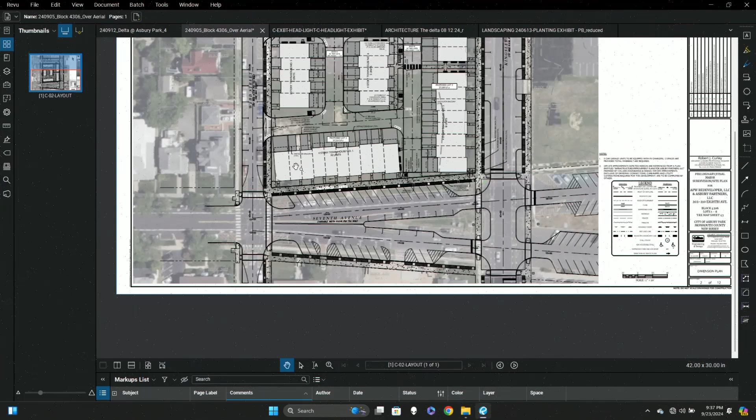This application is for a 4-story building, whereas an 8-story building could easily be constructed. We understand we're providing new development on an existing block that hasn't had development for a substantial amount of time. The waterfront redevelopment plan allows building setback all the way to the right-of-way line, but that's not what we're proposing. We've kept in character with the townhome development, with the front of the unit accessing onto the sidewalk, providing a small front yard area. I believe it's in the spirit of the waterfront redevelopment plan. I'm not suggesting you're not within your rights.

We don't rehash history. The lot wasn't developed for a number of reasons — development rights were held up for over a decade, and then 56 acres was subject to condemnation until there was arbitration between the city and the master developer. So let's not get there. The simple point is you do now block those sight lines from those homes, which were formerly open down the block. I'm just pointing out a fact.

One quick question: one of the renderings showed a mid-block crosswalk across, I believe, Kingsley. That is not proposed, correct? That's correct.

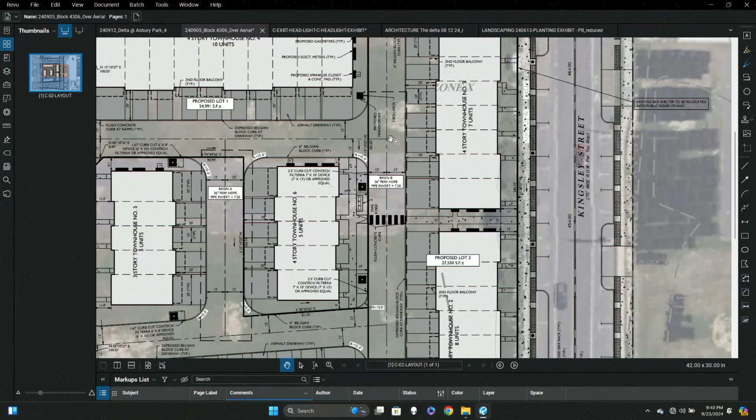There's also a question about trash truck circulation — can you talk about how a garbage truck could circulate this site? This would be private carting. For the residents, they would bring their garbage cans to the end of the driveway. The garbage truck would come into the development, make the turn, have the back of the truck there, and then wheel the garbage cans to the truck to empty them.

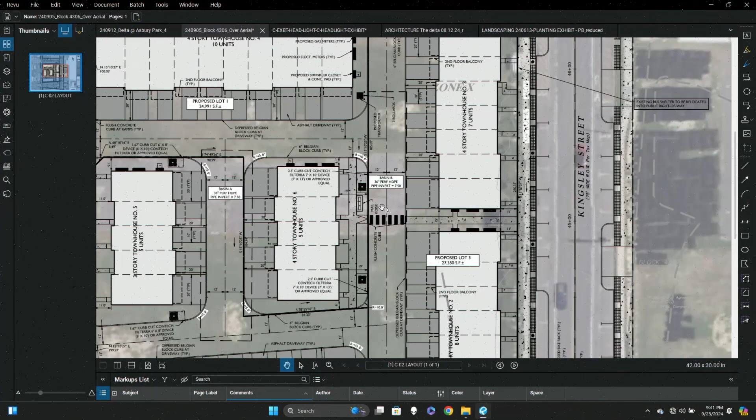So they're going to haul it themselves? There would be no backing down. So someone's going to haul it — not the homeowner, the company, correct? Understood, private carting, correct. So the garbage truck can come into the development, pick up the garbage. In particular for the 3 units on the T portion of the development, the garbage truck would stop, and they would have to wheel the garbage cans from the driveway to the garbage truck and bring them back — the workers, correct.

We've also had questions about utility meters. Can you talk about the location of each of the utilities, at least as far as they're proposed, with the understanding that transformers ultimately have to be approved by the individual utility?

So our proposed meters, we listened hard to comments from the technical review committee and sited the utility meters on the sides of the buildings that would not front out onto any of the streets. On the internal 2 shorter buildings, we have them on the north side. On the east side of the 2 longer buildings on 8th Avenue and 7th Avenue, and in between the 2 buildings on Kingsley Street, so as not to have them fronting out onto any roadway.

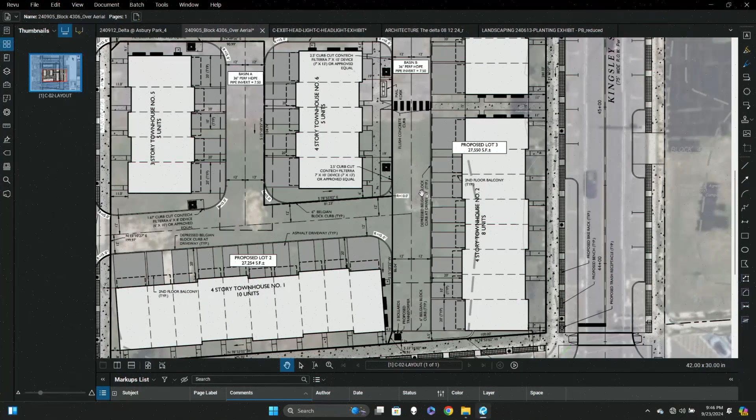So this is a proposed transformer? Okay. So you have the transformer and then you have the 3 on the building, 2 things are meters, and 1 thing is a sprinkler room. Sprinkler room right there, gas and electric.

It seems like those meters are going to be very close to the right-of-way there. They'd be set back probably about 10 feet from the right-of-way. The other location those could be is on the Webb Street side of the building, correct? Were they specifically chosen to be in that location? Well, I would agree, they shouldn't be on the Webb Street side. That again goes to, if you put the sprinkler room closer to the street, then the meters are not so visible. Yeah, that's kind of my point. You're very close to the right-of-way there, on a very prominent road.

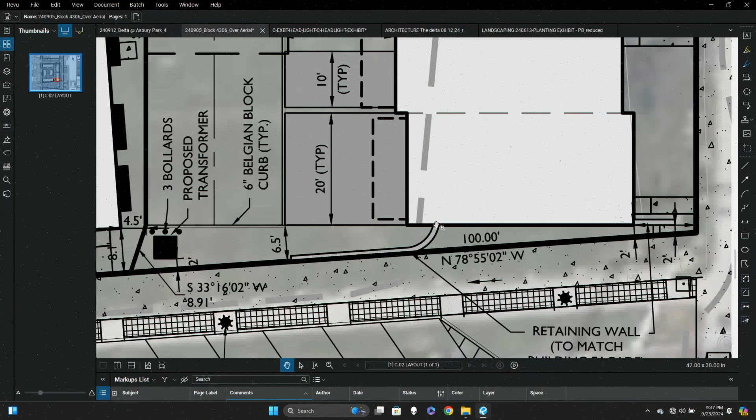Just so the board understands, there were some comments in our initial review, and I was able to modify the plan slightly to provide a constant wall height of 24 inches for both the south wall and the north wall in this area. So both of those retaining walls are now a consistent 24 inches in height.

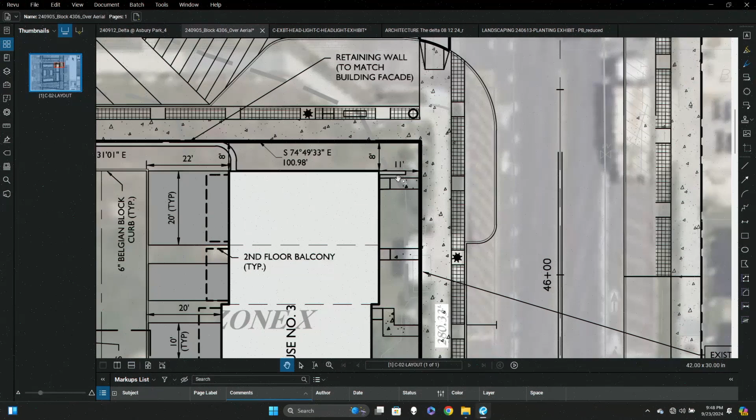The two knee walls that come out at the end of each unit make up the difference in elevation from the stoop. We could have an exposed stoop, soften the grading, and get rid of this wall, but we felt providing this retaining wall gave more opportunity to put in plantings and provided a better design. We were consistent on both ends with that, and it ranges in height from about 30 inches down to 2 feet.

I know you're not on the grading plan, but on the grading sheet in the site plan set, on the southerly corner of building 3, there's a retaining wall, sort of. That was one of the ones I had called out. I'm not sure this is supposed to be here, but you've got one of those knee walls sticking out from that building corner on the grading plan, on the south side of building 3. It doesn't show on that set, it shows up on the grading plan, page 3 of your set. It kind of matches what's going on at the other corner.

Is it your preference to have a retaining wall there or not? We just need to make sure it's needed or not. I honestly think it might have just been from a previous version, something like that. That can be corrected then.

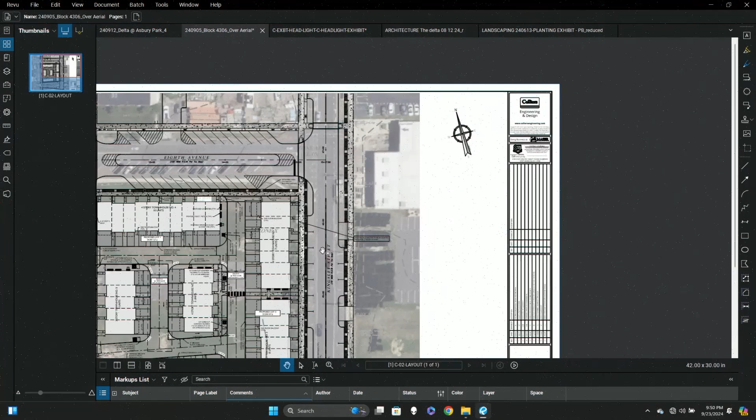All right, I have a few more questions. One, we talked about the bus shelter, can you talk about the relocation of the bus shelter briefly? So currently the bus shelter is on private property, and that needs to be relocated. The coordination of that relocation will be done with New Jersey Transit, and it'll be part of the infrastructure construction plans. It's mostly in the right of way right now, but it encroaches a bit into the lot, a few feet onto our property.

Let's talk about lighting. Could you briefly describe the proposed light fixtures, and also address a note - is it correct that the plans either have been revised or will be revised to indicate a color temperature of 2700 or below? Yes, they have, they were modified with the resubmission after our first review. It is designated there, it's smaller text and it's in the box, but it's definitely designated.

The lighting plan in the engineering set includes all of the proposed street lighting that surrounds the development, and those foot candle values were also included. One comment, I believe in the architectural review, indicated there was light spillage off our property. When I turn off the lights surrounding the property that are proposed as part of the infrastructure, there is absolutely no light shedding from our property at all. The fixtures we're proposing are consistent with the street fixtures, although slightly different. We'll make sure the color temp is 2700 and the light fixture height is 16 feet.

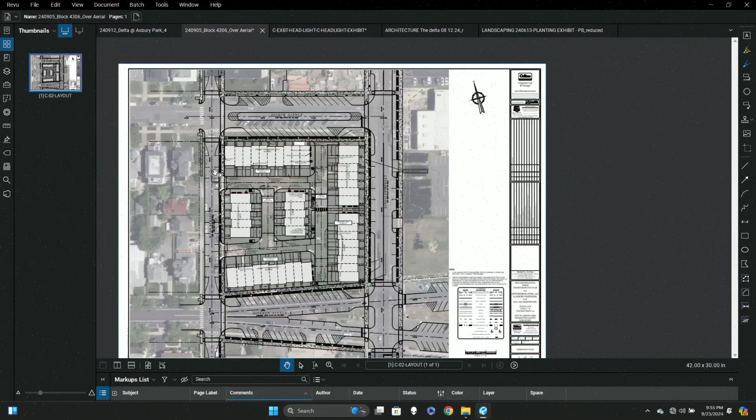I'm going to come right back to this exhibit, but I want to look at the overall aerial. Our driveway on the south end would enter out into Webb, and Webb Street is a one-way street, so that would be a right-hand turn leaving our driveway. What's directly opposite our driveway for a vehicle exiting is an existing garage, a two-car freestanding garage. So what we wanted to focus on was the northern driveway.

We wanted to understand any potential impacts we may have on the adjacent residents. So we looked at the location, and then also the elevation of the proposed roadway we're tying into compared to the existing finished floor of the adjacent dwelling across the street. The finished floor is approximately 5.5 feet above the existing roadway.

When a vehicle is exiting our site and turning onto Webb Street, making a right-hand turn, his headlights that would potentially be shining out are going to be well below any existing windows on the east side of the structure. Again, the roadway is 5.5 feet below the finished floor. If you say the lights are up 2.5 feet, we're still 3 feet below the finished floor for any lights shining straight out of the vehicle and then turning onto Webb.